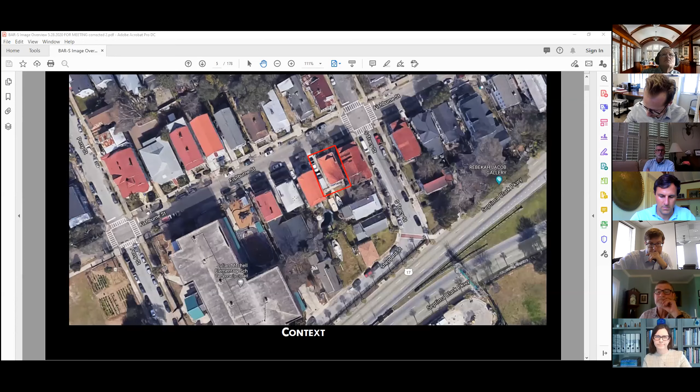Alex, can you tell me who the applicant is for this item? The applicant is Brett Morris. Okay, and if you would unmute and allow Mr. Morris to speak, once I conclude the introduction.

So this is some existing site photos. This is the property in question right here, a closer up view of it from Fishburne, and yet another view from another angle. Here we're looking east on Fishburne Street, and looking west on Fishburne. At this point, I'll turn it over to the applicant for their presentation, if you could allow them to speak, Alex.

So I will be promoting Brett Morris, and I believe the owner of the property, Catherine Xenia—sorry if I butchered your name. I hear some talk in the background. Does somebody have a TV on, or is that in the office, Alex? That's probably me, I'll stay muted. Okay.

Mr. Morris, are you with us? I'm here, can you hear me? Yes, sir. Okay.

So do you guys have a PowerPoint that I'm following along? Okay, so I didn't prepare really a formal presentation to go along with this PowerPoint. I thought that I was just sending pictures to Kim. But if we just kind of go through it...

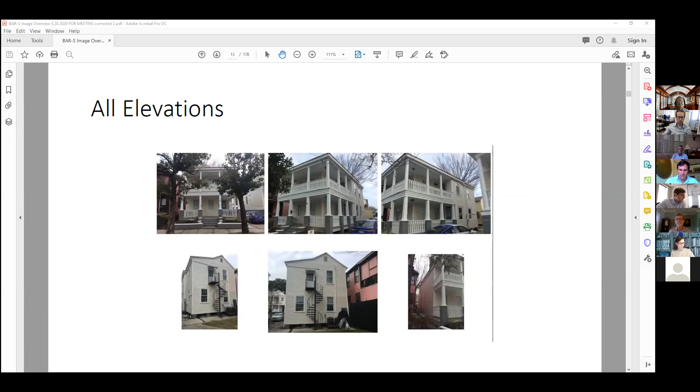I'll remind the board that this is in an area for demolition only, so demolition of the siding is the only thing we're considering tonight. Gotcha. So it's just the siding—the trim, any historic trim, the columns, the soffit, fascia, crown, window trim, all of that's in good shape and we plan to keep that. It's just the lap siding that we're looking to demo.

And it's got lead paint. We plan to follow all the lead-safe EPA procedures. There's 20 or so pictures in this slideshow. That's kind of our scope of work there, but that's pretty much what I just explained.

New lap siding and corner boards, but all other trim to remain as is. The real goal of this is to get it watertight, with flashing, moisture barrier, and sheathing. We've had it exposed for a couple of months now, so we're just trying to figure out what we need to do to get it approved.

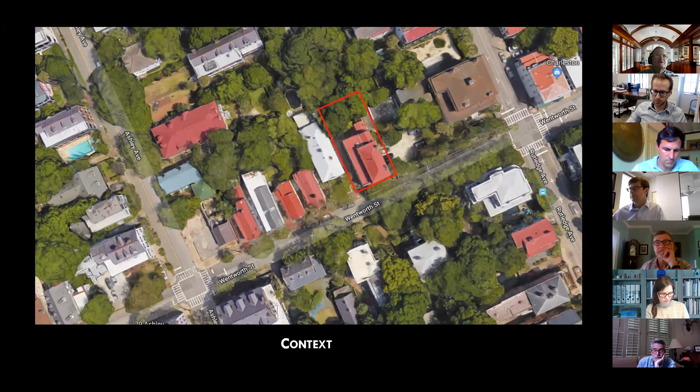Pre-1911 and 1809, the original house 1809, the addition pre-1911. So this is the location of the property. We've seen this project before here, just east of Ashley Avenue on Wentworth.

Some existing site photos of the existing house, and a view of the location of the addition here from the street. Looking west here on Wentworth Street, and then looking east on Wentworth.

The previous motion was deferral for more information on partial demolition of the rear addition in January of this year. Previous board comments: one board member said they would have to have new evidence or change from what was previously presented. Another board member said that from the last review, the applicant is now willing to reuse the foundation and SHPO is okay with the demo, and that was a question.

Are these two issues enough to change a prior board motion? We have to make a determination that enough has changed to alter a prior board motion. Maybe with a deferral, the applicant could get clarification as to whether SHPO is supportive of the demolition. A third board member said, I want to make sure that we don't just kick the can down the road. We all agree that this is a well-built addition.

And with that, I will turn it over to the applicant for their presentation. Alex, if you could allow the applicant to speak, please. I'm promoting Shelley Clark Glidewell to a panelist, as well as John Massillon.

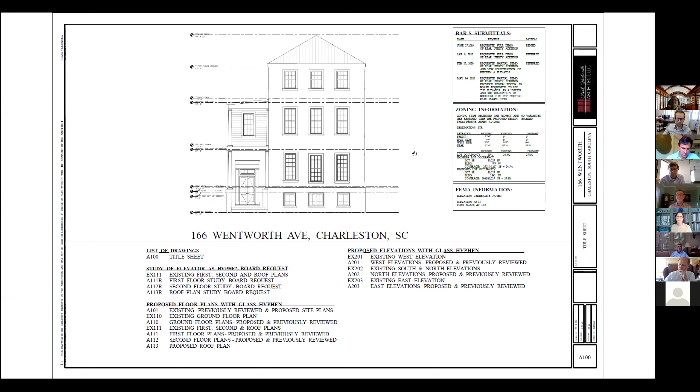Okay, well, we can go to the second sheet. Move forward. Bear with me for a moment. Okay, what I did here was we did a restudy of our previous February 27th presentation.

We had some board members make a suggestion of pulling the elevator in, yes, correct, and try to make it work within that, to make it as a hyphen.

And what happened is we had problems with the design in a couple areas, and the owner was not happy with the location of where we put things. We had to move the powder room so that it was alongside the rear piazza window, which they didn't really want to have happen, mainly because it would not be very nice. And they also didn't want it next to the dining room, which is up in the top there, yes.

And then one thing that also happened is that when we brought it, it's a very narrow space. We already have that brick hyphen there that's off of the original 1809 building, and this brick hyphen that comes off where the kitchen is now is from the 1830s.

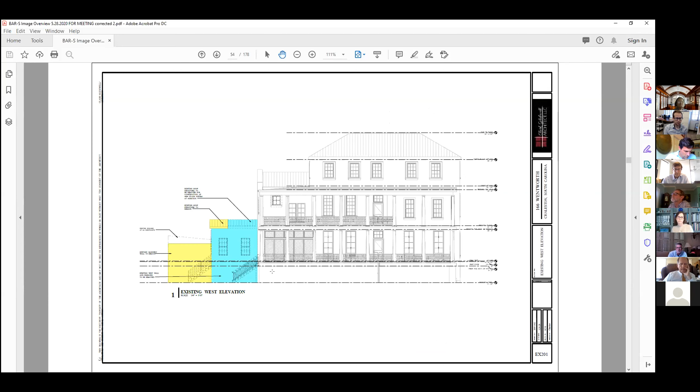This shows our new design, which you can see above on the top. We had the elevator tower pushed up against the rear piazza, and now we've pulled it away with the 3.5 foot glass hyphen. One suggestion the preservation groups have requested is that we make that hyphen a flat roof, to create more definition between the two, instead of extending the gable roof over to the brick hyphen.

We don't have a problem with that. I did make the hyphen contemporary, so it's all glass.

The rear portion of the addition is being removed, but we're going to keep the roof. We'll support the roof with the new structure. You can see that historic wall and how far it goes up, and that is to remain.

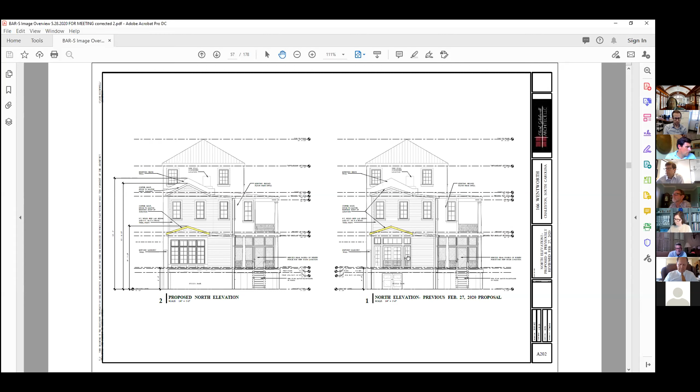Our previous rear elevation had some doors going out to it, with a little railing along the windows and doors. We've taken that out completely and now used windows—tall windows with transoms at the top. We've also moved it so there's no door at the rear for storage at the ground floor; we've only put it on the west elevation.

This is the east elevation. Again, we're saving as much as we can. We've got the portion where the two-story addition goes up that is going to be removed—the blue area, correct.

And then we have, again, our glass hyphen. We do have it in line with the two-story addition.

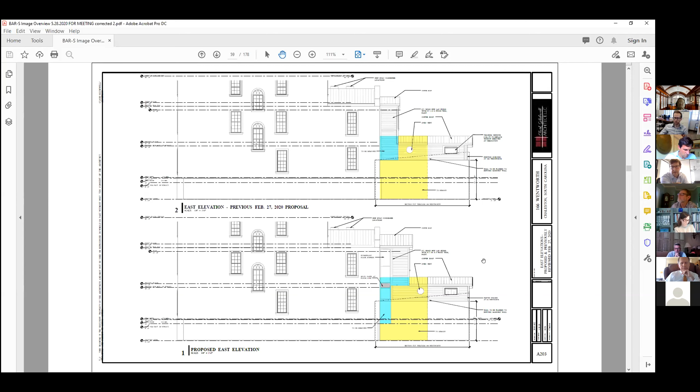Okay, the next one. That's it. Okay, and then we had some photographs. I don't know if you have access to them, because we can see where the...

Just these photographs, Shelley, okay? I had submitted photographs showing the addition at the rear, and things that the board has already seen, but I also included a new photograph of the rear piazza railing, just to show you that it did exist and it was in one piece.

Was that part of your PDF that we're looking at now? I don't think I had it as a separate PDF. Yeah, that's why it didn't get in here. Oh, the submittal requirements require one PDF.

Okay. Well, I will verify that there is the true baluster and railing still in existence. We also wanted to make one comment: we do want a definite decision tonight and hopefully not get a deferral. That's what we're trying, not to have a deferral tonight.

Thank you. Does any board member have any questions right now?

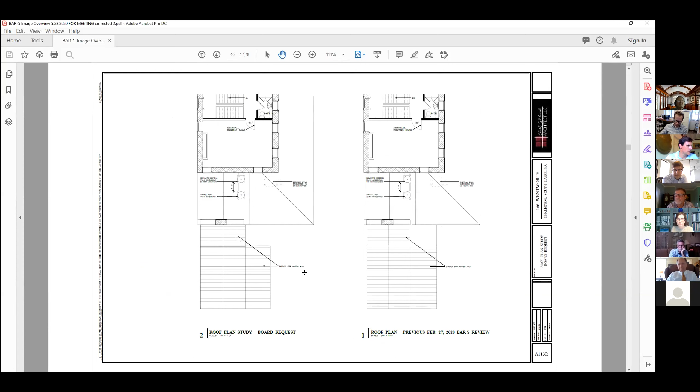Well, right now when they open up the door, there's just not enough room to really get in. When you come up and everything, you'd be right next to it. I mean, we can make the landing smaller. It's just that when you come up to the door from the backyard, it's hard to just go in. It's just not enough room. That's all. Thanks.

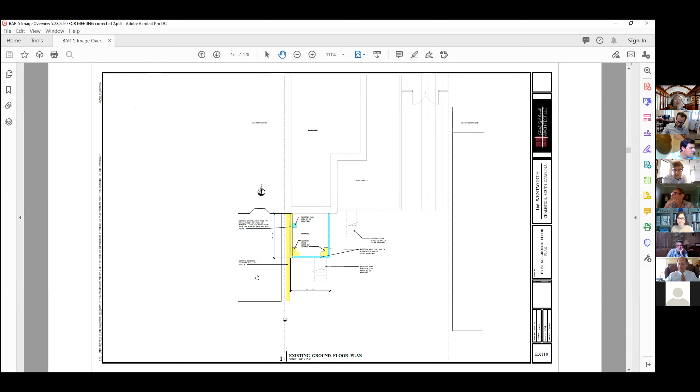Any other board questions right now? I had one question, Mr. Chair, if I may. Please. Let me get to the second floor.

Shelley, is this opening right here an existing opening, or is that a new opening in a new location? It's enlarged, there's a window there. You can see we've kind of filled it in to the left and had to enlarge it a little bit to make the opening work for the elevator hall. Kind of moved it a little bit to the right, you're saying? Okay.

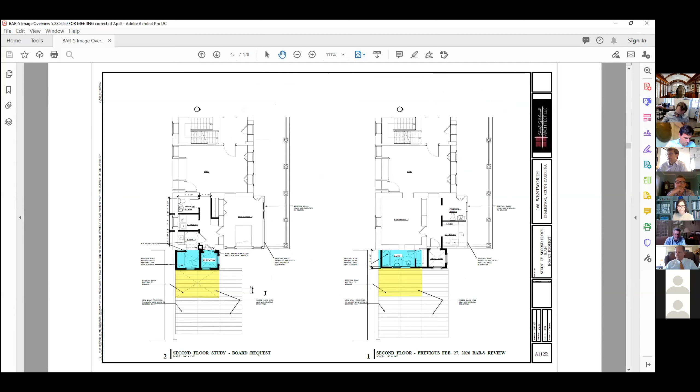Historic Charleston Foundation believes this project is moving in a good direction. We suggest a flat roof at the two-story hyphen portion to further differentiate this section from the historic structure, and by that I mean the entire two-story mass, not just the glass hyphen area. On the east elevation, we recommend extending the hyphen corner trim board down so that the two-story hyphen section reads as a separate mass.

We also have concerns about the oven vent size and hope that this can be reduced. For preliminary review, we recommend simplifying the drawings and not including the options so it will be easier to understand the project. If these recommendations can be addressed, HCF recommends conceptual approval. Thank you.

Okay, well, just to point out that the project was deferred in February, with the board directing that the elevator tower be pulled into the rear addition, retaining as much of it as possible, before expanding widthwise to create a livable kitchen area. This building is a category 2, which is reviewed with much more scrutiny.

Category 2 is defined as excellent high style regional architecture, fine Charleston style, well designed and proportioned with good detail. These are spirited, dignified, frequently innovative, rare, and always attractive and interesting, of irreplaceable importance, to be preserved in situ at all costs.

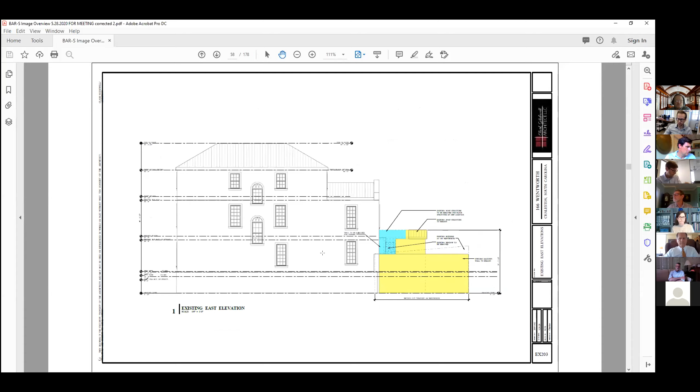One thing I wanted to note is that my owners love their house, and they have lovingly restored the category 2 building. They haven't taken it lightly; they have gone to great pains to restore that building. So when we put this addition on, we're not just trying to destroy the original building. I just want that to be noted.

Also, I presented the restudy to show the board that we did look at it, but our proposed design that I talked about more in depth is what my owners request for the review. And I think that is basically what we want them to review it on. So that's my response.

Mr. Chairman, John Maslon here. I would not comment on the architectural features, but thank you.

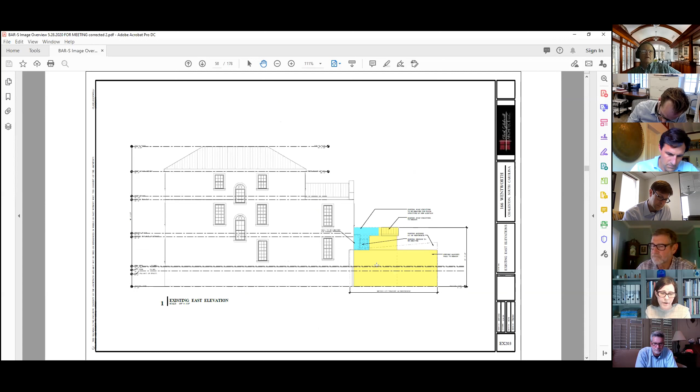So here's my draft motion for conceptual approval of the proposed design with the following board conditions. Number 1, shift to a flat roof for the 2-story addition. Number 2, eliminate the glass at the east elevation. Number 3, extend the corner board on the east elevation down between the 2-story and 1-story addition. Number 4, eliminate the landing at the relocated stair. Number 5, refine and simplify the proposed fenestration. And finally, switch the railing sections, the balustrade sections, at the rear of the piazza to avoid further alterations to historic fabric.

And I would remind you that you also need to make a decision about demolition. Oh, we do? Was that part of the application? Yeah, partial demolition. Okay, can I also move for approval of partial demolition and approval of the proposed design? And finally, final review by staff, I think would be fine at this point.

Dennis, question. Yes, sir. So there's really two things going on here—it's an approval of a partial demolition. Would it be the materials that are necessary to accommodate the proposed design? I think the board needs to determine to what extent partial demolition is approved. Well, I think what we're saying, or what I'm hearing at least, is that we recognize that partial demolition is necessary to achieve the proposed design, and I think we're okay to the extent it's shown as part of the design to be removed.

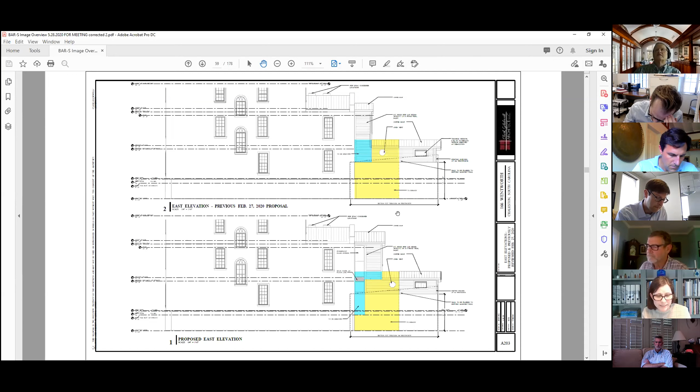I agree. If we're doing final review by staff, I'd like some clarification on the refinement of the fenestration comment. I had said refine and simplify, and honestly, I would trust staff to take that and run with it. I just think if you could look at the west elevation—I mean, there's a lot going on there with the transom, the doors. I just think it could be simplified and a little more cohesive, and I have every confidence staff could help guide that.

Okay, so Julie, to be clear, number five relates solely to the west elevation? No, I think it would follow with the north elevation if you change the window light cuts to 2 over 2. Okay, so all fenestration on the addition.

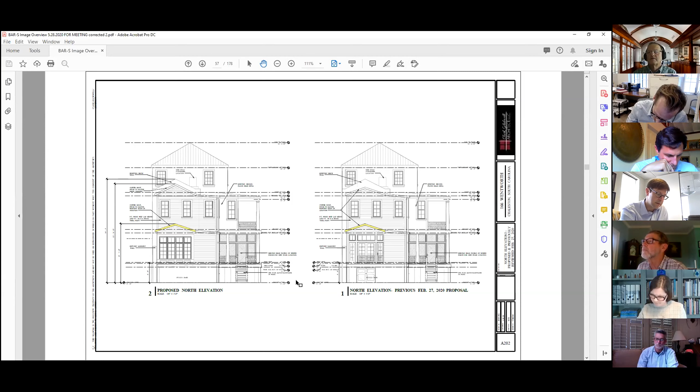I have a question for clarification. When we're talking about the demolition, are we approving it to the level shown on EX110, which shows everything demolished except the wall and two parts of the foundation? So just for clarification, are we approving the demolition as proposed on the approved drawings? That's my understanding, Fillmore.

Dennis, is that your understanding? That is my understanding, Fillmore.

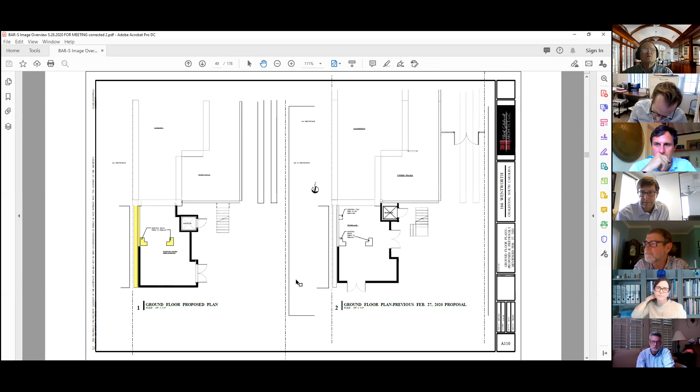Okay, Jay, can I ask a question of the applicant for clarification? Shelley, are these windows double hung or are they casements as proposed? Alex, you may have to allow her to speak, just a second and I'll unmute you. Okay, Shelley, you can unmute yourself.

Okay, can you hear me now? Yes. They are double hung, and basically the other windows on the other parts of the house are double hung or triple hung. Okay, great, thank you.

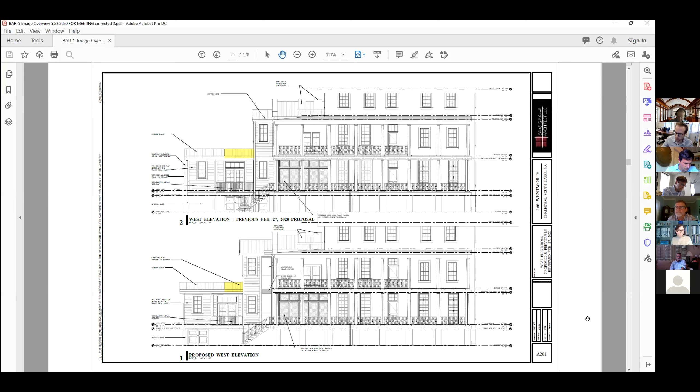That was it, okay. All right, I'm going to start over, I think I got it now. So Julie's made a motion, number one, approval of partial demolition as depicted on drawing A110.

Conceptual approval of the proposed design with the following board conditions. Number one, modify the roof design to include a flat roof for the two-story addition. Number two, eliminate glass at the east elevation. Number three, extend the corner board of the east elevation down between the second and first story additions. Number four, eliminate the landing at the stair. Number five, refine and simplify fenestration on the proposed addition. Number six, switch the balustrade and railing sections to avoid unnecessary demolition of historic fabric, with final review by staff.

Does that sound right? Yes. Okay, so Julie's made the motion. Bill, is that what you seconded? Yes. Okay, I'm going to call a roll.

All in favor of the motion signify by saying aye or yes in favor, or no, not in favor. Julie - aye, in favor. Bill - yay, in favor. Glenn - aye, in favor. Fillmore - yay, in favor. The chair votes yay, in favor. The motion passes.

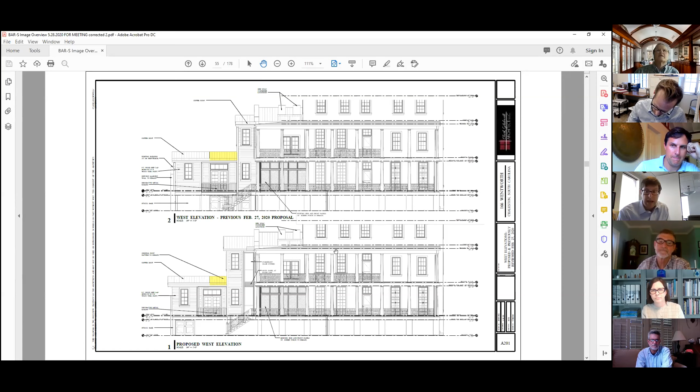Next agenda item is 23 Legare. This is a request for final approval for new construction of a pool house and garage, another Category 2 structure in Charleston, circa 1838, in the Old and Historic District.

Existing site photo showing the area for the pool house and garage. Looking east on Legare, and looking west on Legare.

The previous motion was conceptual approval with staff conditions noted, a board condition to verify visibility of the skewed garage, and final review by staff, that was January of this year. One board member said get the whimsiness of the garden folly. The garage doesn't qualify as a folly, it's not encroaching, but the offset is just for parking accessibility.

Another board member said the bridge is a letdown, it's just too plain, a mock-up may be warranted. Another board member said there's a focus on the folly and not the garage. A fifth board member made an important point: if staff discovers that the garage is visible, bring it back to the board. And we did, which is why it's here this evening.

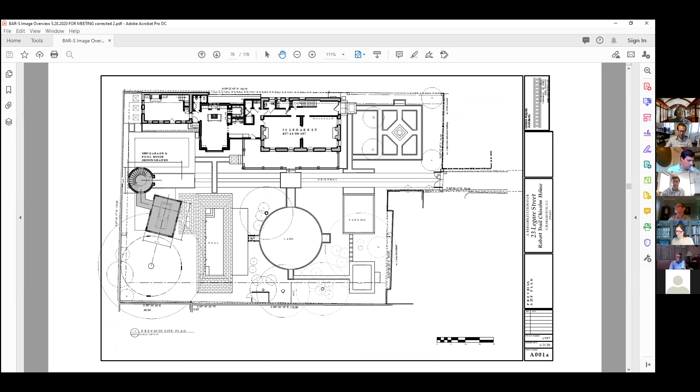In the redesign, we pushed it over. As you can see on the site plan, we pushed it over about 16 inches, as far as we could, to get close to - that's the previous site plan, Dennis. There you go, that's what you're looking for, isn't it? Yeah, so we pushed it over 16 inches, we got it to the setback line of the live oak.

But we do think it's important for usability, and we think it's the quirkiness of having a folly, that having the garage kind of skewed is actually beneficial to the overall design.

If you look at the photograph from the road, go back to the first one, you can see. I'm not sure at this distance if it's discernible whether that garage is on an angle or not. It's really a very small item in that photo.

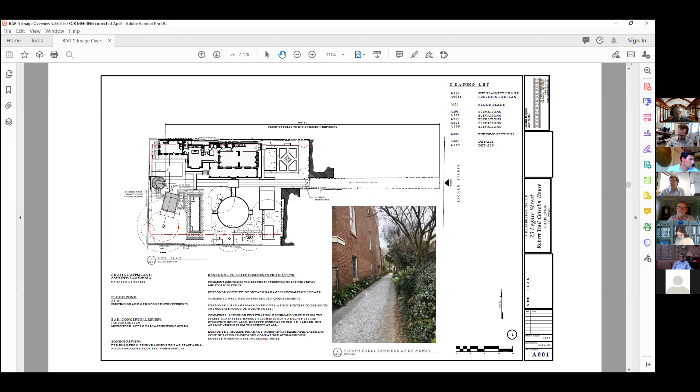We also took staff's comments and redesigned the windows in the package on the garage element, enlarged the size of the rosette windows per comments. I think it's minimally visible, and I think it's going to be a nice addition, a great asset to the property. So we would ask for your approval, please.

Thank you, Glenn. Is there any board question at this point? Bill Huey, I have one question of the applicant. One of the previous board comments was concerning the detailing of the connection bridge. Did you do anything to address that?

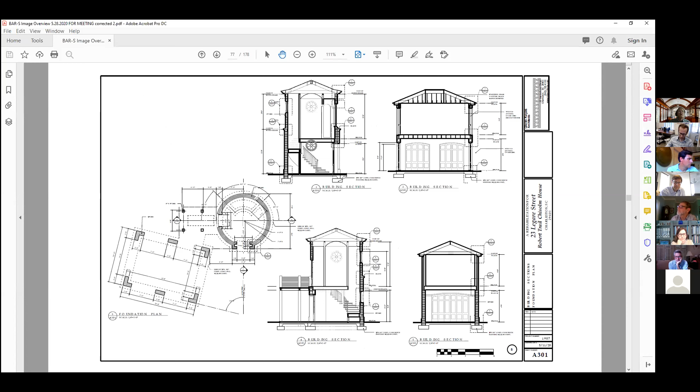We did. There's more detail on that element. It is very simple. We were trying to keep it as a minor part of the design, as minimalist as we can between the two structures. But we did make some changes, and we also added lattice work at the lower end of it to shield the mechanical equipment, which is on the west side behind the bridge.

Thank you. Any other questions? Okay, Alex, is there any public comment?

Yes, we have one person who signed up to speak, and I will allow Erin Minnigan to speak, and you can unmute yourself. Thank you. Erin Minnigan with Preservation Society of Charleston.

The Preservation Society continues to feel this is a very unique design, and being relatively far from the right-of-way, agree it will not have a major impact from the street. We are glad to see the garage building shifted further away from the circular folly. We feel the separation between the buildings has been eroded by the addition of the HVAC screening. We would encourage studying relocation of the HVAC behind the garage to allow an open view between the two buildings. Also, elements of the two buildings, including arched windows, express keystones, and copper and slate roofing, are too differentiated, and we would encourage the applicant to study unifying the materials and details to better relate the buildings. Thank you.

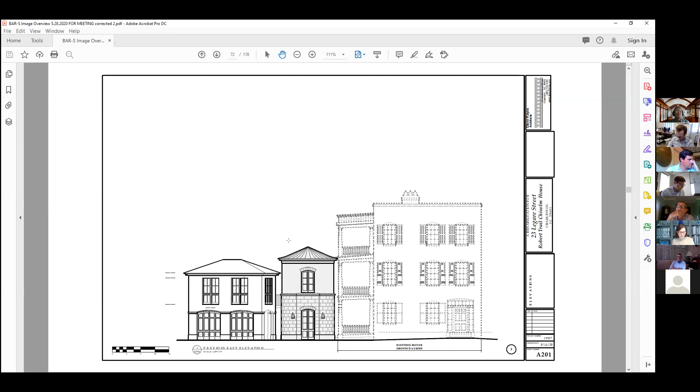Yeah, okay. I appreciate your comments. I think I would ask Dennis if you could possibly let us work this out on the bridge. I think it's a simple thing. I'd hate to have to wait another month or two to get this approved. Well, we're recommending final review by staff, Glenn. Okay, all right. Okay, thank you.

You're welcome. Okay, board discussion. Bill Huey, I agree with staff's comments. It is a nice, really unique design. I really do think that there are only two things lacking, to the point of Ms. Minnigan's comment about the HVAC screening. If possible, the units could move further down behind the garage and leave that open. I believe that would be a much nicer effect.

And also just whatever degree of detailing. I know that's a very minimal point, probably not even visible, but even something as subtle as chamfering the 8x8 posts, just to give it a little bit of refinement, since those are just big square blocks of wood. The main reason I've raised that point is because of how well this rounded tower is articulated, so just some degree of complementary detail to that. Very subtle, but otherwise I agree with staff's comments and recommendation.

I agree with staff. I think the folly, the stair tower, is very interesting, and I think that's obviously what's prominent here. I think the bridge reads more as an element of the folly than the garage, so it needs to have a little whimsy along with the round tower folly.

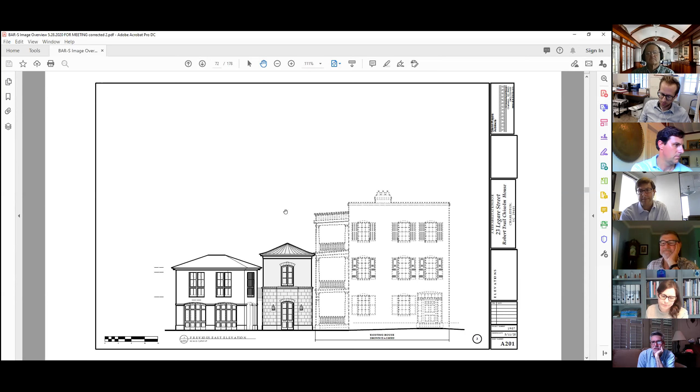Would that be for the HVAC relocation, or the articulation of detailing on the bridge? Well, either or both. Is there maybe board discussion around any additional board conditions to add to staff recommendation?

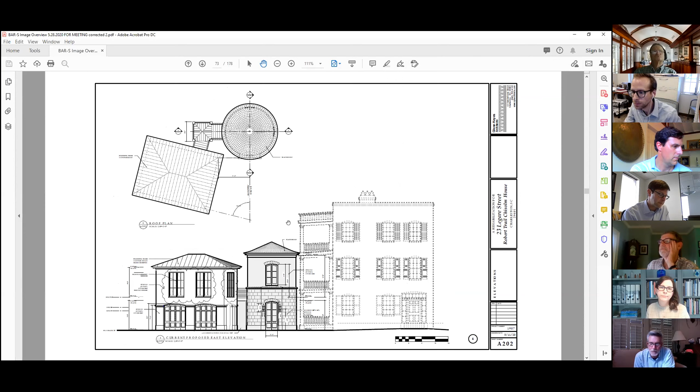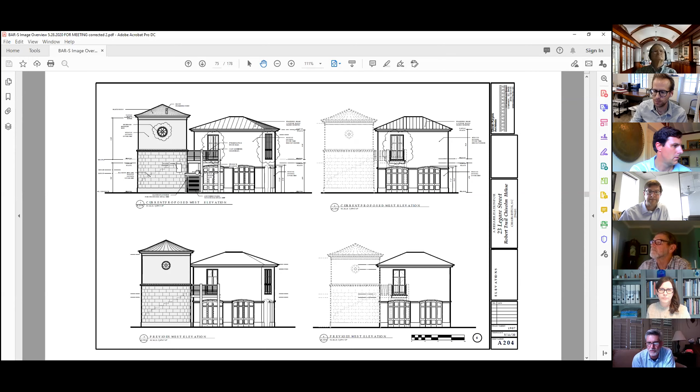I may ask a question, Mr. Chairman, of the applicant. In conjunction with those comments, Glenn, are you still with us? I wanted to ask about the HVAC equipment and the platform. So we are seeing on the drawing screening, and I assume the unit is that visible unit sitting there as a block, unscreened from the back, correct?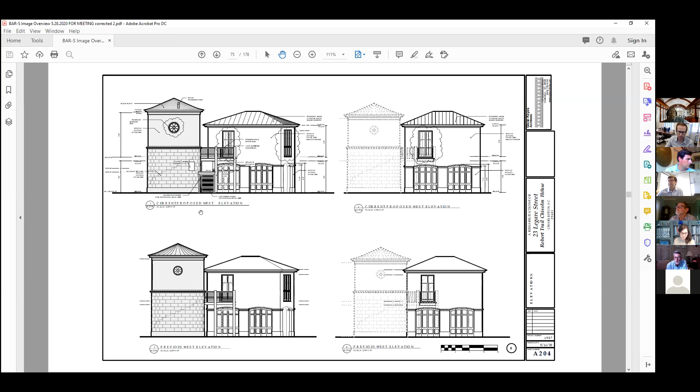That's correct, we could screen on the back. No one likes to see this equipment, and now we have to elevate it above BFE, so there's very few places we can hide it because we're getting close to the property line. If you look at the site plan, we could put it behind the garage. That would push it south and put it completely behind the garage. It might be more visible to those who live there, but it would move it just to the south of the existing place. That's about the only place we can move it, and we could do that.

And I guess my other question, Glenn, was is the air handler unit, the actual blower, going to be inside over the garage area primarily? Is it serviceable to move it over into that back corner of the garage behind the bridge? It is. That'd be fine. Yeah, we can do that.

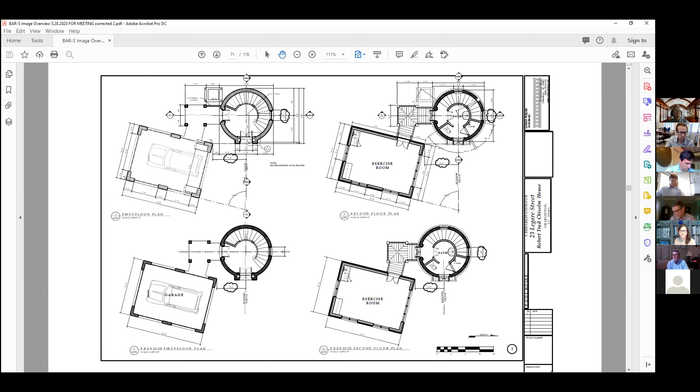Thank you. If I may, Bill, it might be good to just extend this platform out and screen the unit and have it sit right here so that it's integrated with this connection, not yet again another feature. Yeah, I do believe that's a good point. By the time all that happens, it will be virtually out of the public purview, so that's a good solution.

Okay, is anybody feel like proffering a motion? I will, Bill Huey. I'll make a motion for preliminary approval with the condition to restudy the articulation of the bridge elements and relocation of the HVAC platform to the south in conjunction with the bridge element, and final review by staff.

I would second that, this is Julia. Okay, so here's the motion on the floor: preliminary approval with two board conditions. One, to restudy the articulation of the bridge element, and two, to relocate the HVAC platform to the south in conjunction with construction of the bridge element, and final review by staff. Is that y'all's motion? Yes. Okay, so I'll call the roll for a vote.

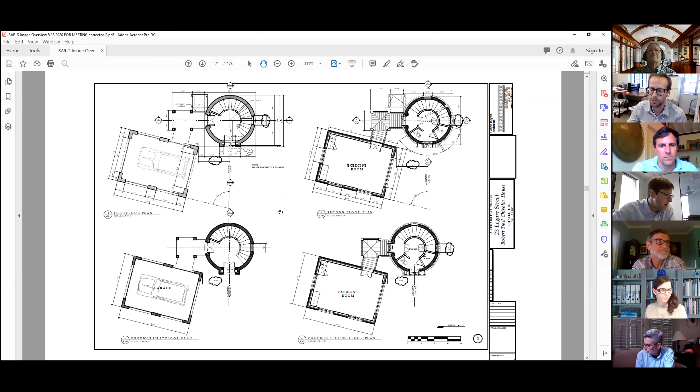Again, y'all know how to vote. Bill Huey, yay, in favor. Julia Martin, yay, in favor. Glenn Gardner, opposed. Fillmore Wilson, yay, in favor. The chair votes yay, in favor. The motion passes 4-1.

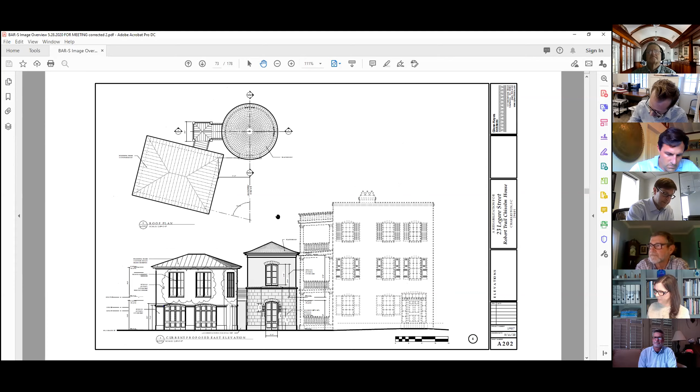Dennis, I think we lost Bill again. This is Alex. Oh, okay. I think Bill's gonna have to go to his office next time. Let me see if I can get him back. I'm sure he knows that he's not in, but we'll see.

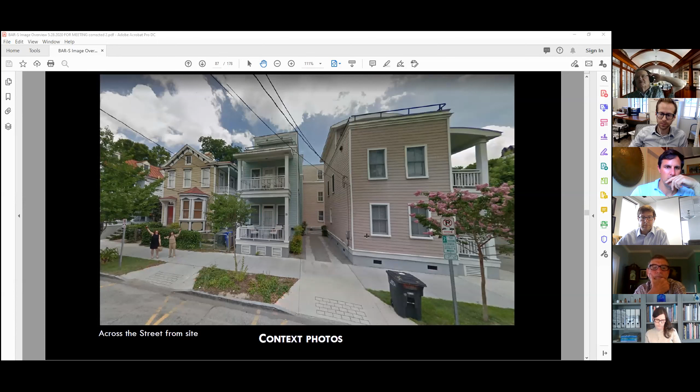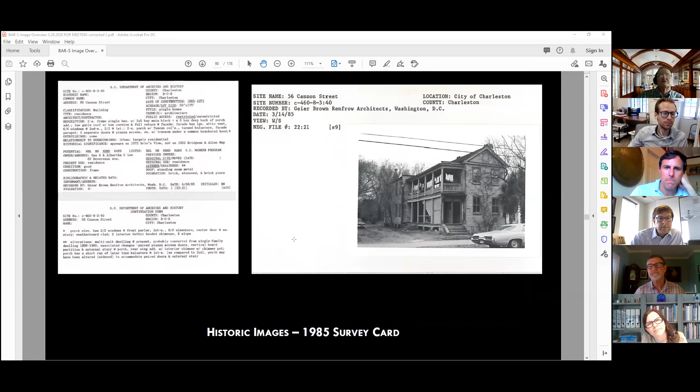So this is a view from across the street from the site, with some excited neighbors there, looking east on Cannon, and then looking west on Cannon. And this helped us identify the age of the building, which is 1865 to 1872, and the Sanborn maps confirm that. With that, I'll turn it over to the applicant.

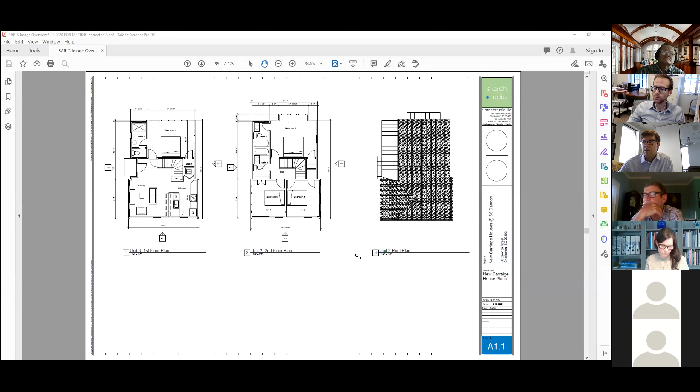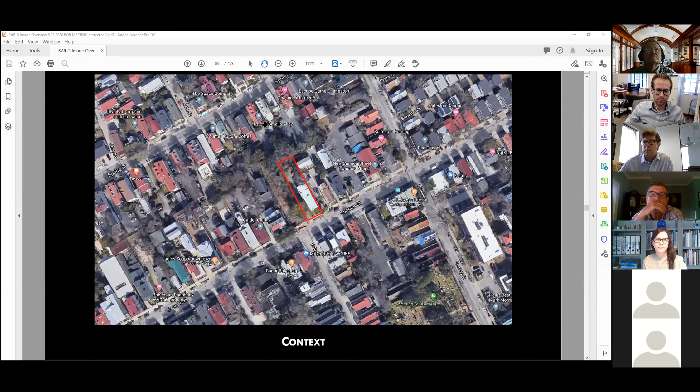Guess with that, I'll end and answer any questions. Okay, thank you, John. Are there any questions from the board at this time? Okay, hearing none, we'll go to public comment.

Alex, Jay, I have one question, if I may, sorry, I was muted. John, are there any variances or special exceptions required for this? No, we meet all setbacks, all lot occupancy, parking, et cetera. We've gotten the site plan approved from zoning. Okay, thank you.

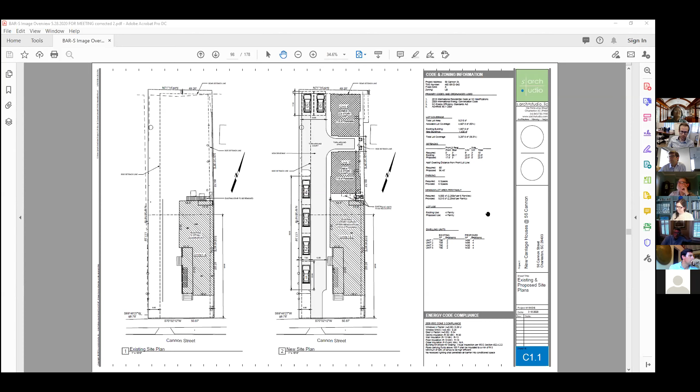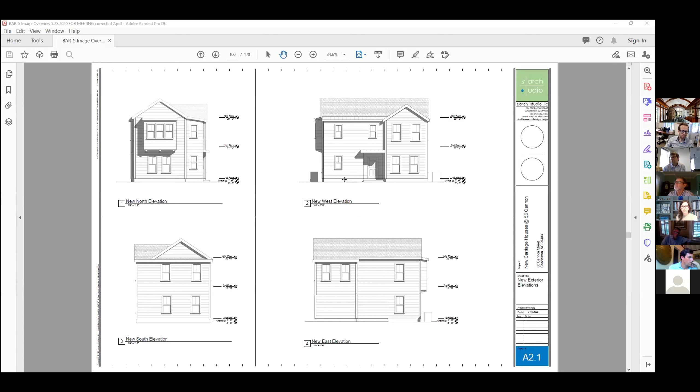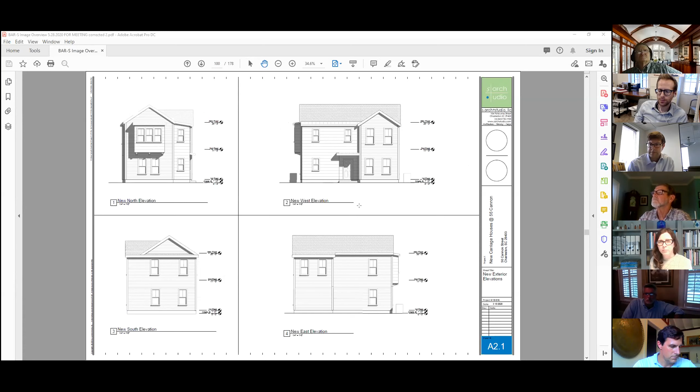This is Julia Martin, and I looked at this property today, and the visibility would be pretty high as you look down this driveway from Cannon. Similar to staff's concerns, I'm afraid that as you look down that driveway, it would all read as one big solid mass structure. I think these are pretty large footprints and aggressive programs with 4 bedrooms each, and their west elevations come out flush—not with the historic mass of the single house, but with the additions and infill at the rear of the existing house.

And there's less than 6 feet of breathing room between the old and the new. So although I do think this property can handle 2 dependencies, in my mind, the mass and scale of these is just too much, and the architectural direction lacks delicacy and deference to the historic.

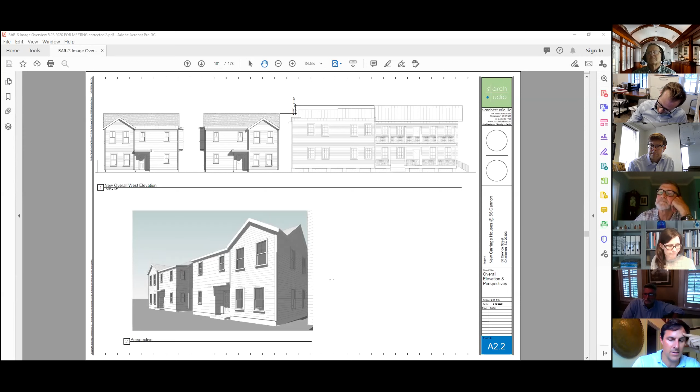Glenn Gardner: I would frankly echo exactly what Julia said. I think the program for what is trying to be shoehorned on here is just too aggressive. And I know zoning has approved the site plan, but the parking just doesn't function, but I'm not the zoning department. I think the program requirements are making it overwhelm the site.

Fillmore Wilson: I agree with Glenn and Julia and staff. There's a lot of program on this site, and I think the mass of the buildings is too great. And I agree with staff that the architectural direction lacks subtlety and deference to the historic structure. So I am in agreement with staff.

Bill Huey: I really don't have anything to add. I agree with the comments that have been made. Chair: Okay, I'm aligned with staff too. Is there any other discussion to provide direction to the applicant in terms of to what degree to shrink the footprint, to pull it in, pull it away? That's what I'm getting at.

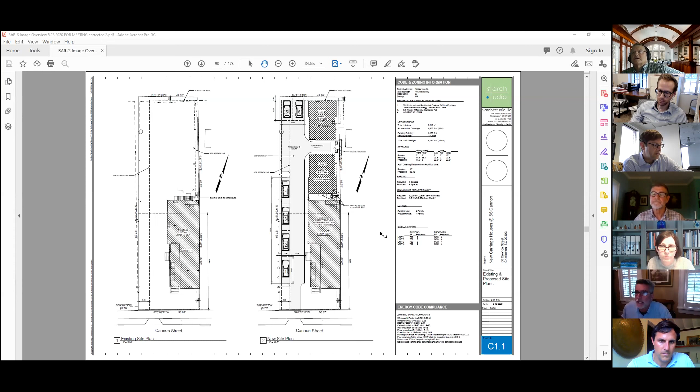Glenn? Aye in favor. Fillmore? Aye in favor. Bill? Yay in favor. Julia? Yay in favor. Chair votes yay in favor. So the motion passes.

Okay, the next agenda item is 241 St. Philip Street. This is a request for conceptual approval for new construction of a single-family residence behind 3 previously approved residences at 243 St. Philip Street. It's new construction in Cannonborough Elliotborough, the old city district, and height district 2.5, 3. So St. Philip here, south of Line, north of Bogard Street.

West side of St. Philip. This is a view of the site right here. And looking south on St. Philip, the site over here on your right. And then looking north with the site over here on the left. And I will turn it over to Mr. Gould. Alex, if you could allow Mr. Gould to speak.

Sorry. All right. Hello, can you hear me? Yeah. Yes. Good. All right. Well, maybe Dennis, could you go to the first slide, the first site photograph?

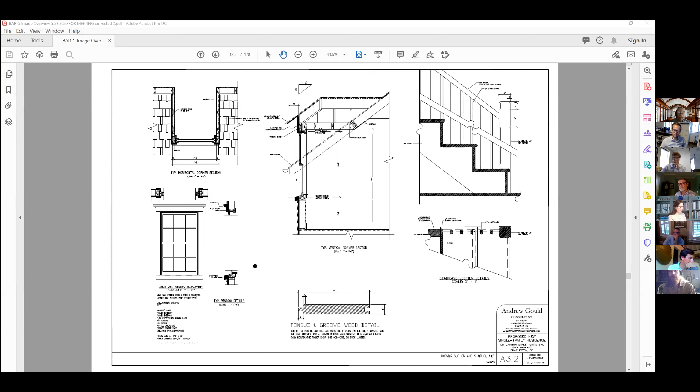But like I have done with those other 3 houses and with most of the houses I've designed in recent years, the 3rd story is kind of disguised to really just look like a 1/2 story from the exterior. And moving on, you can see again my typical details, which are of course a lot better than what one sees on most new houses—beaded trim and sills and moldings and everything of the quality that you typically see on a historic house in the neighborhood.

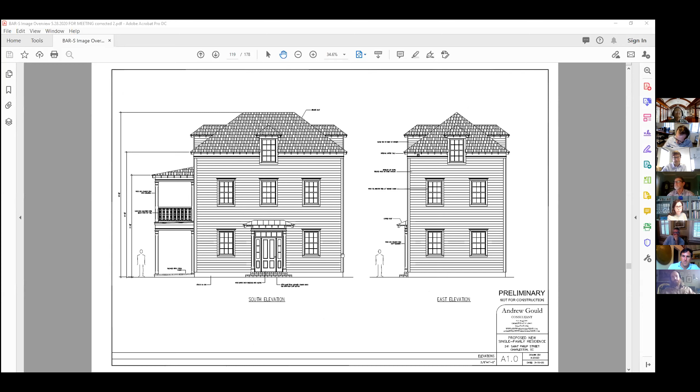As you can see on the 1888 Sanborn map, it was actually a distinct parcel even then. So it's kind of always been a landlocked lot, and somehow that McHugh Alley got forgotten over time and no longer appears on plats or the tax map. But yeah, it's always been its own lot.

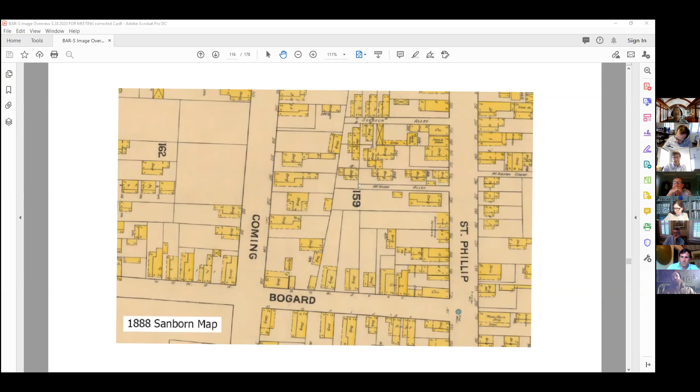Okay, one last thing. Will that reestablished alley be a public right-of-way or private? No, I certainly don't anticipate the city wanting to take it over. I think it would just be a matter of giving that easement that exists there a name and a street sign, if we can get the blessing from GIS and addressing to do so, because the addressing is kind of stupid right now. It would be 243 A, B, and C followed by 241. I'd rather it be 1, 2, 3, and 4 McHugh Alley. So hopefully GIS will allow us to do that. Thank you.

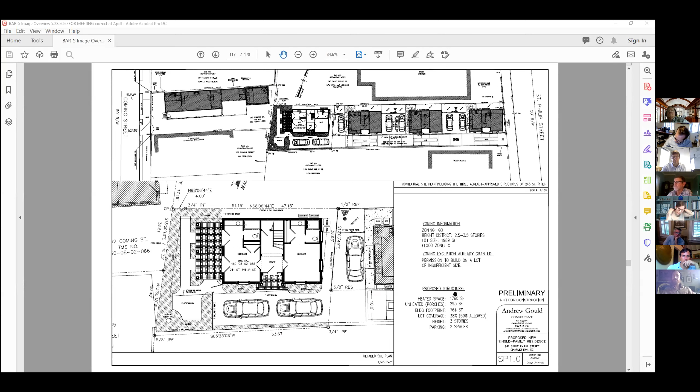Any other questions? All right, so Alex, we'll go to public comment. Is there any public comment? No public comment for this one. Okay, so we'll go straight to staff recommendation then.

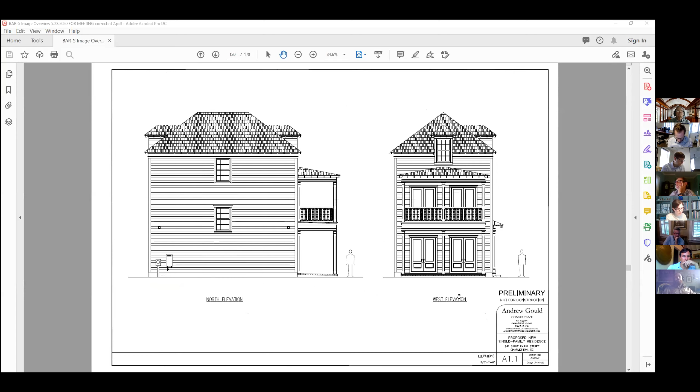Let me bring that up. So this proposal is taller than the approved buildings fronting on St. Philip Street, and in addition, it towers over the house at 262 Coming Street. It is not subordinate to either of these buildings, directly contradicting the ordinance—that's 54-306 General Requirements, paragraph 12—and the principles. Height, scale, and mass, therefore, need to be restudied to be lower, smaller, and less massive.

Proposal also does not meet the ordinance requirements for the ratio of height to width, and this is an even bigger issue I think—that's paragraph 9 of those same general requirements. The width will need to be reduced to comply with that requirement. The space between the window heads and eaves needs to be reduced. This will help reduce the height and mass, but this alone may not be enough.

The building is essentially a replicated version of many designs the board has seen lately, and we feel the balustrade is high style for a rear structure—chamfered columns, decorative balustrade. Otherwise, details and materials are well conceived and appealing. So we're recommending deferral for height, scale, and mass with the conditions noted. And I'd add that the board does have the authority to reduce the height by a half story for context immediate to the project and greater context. And that's it.

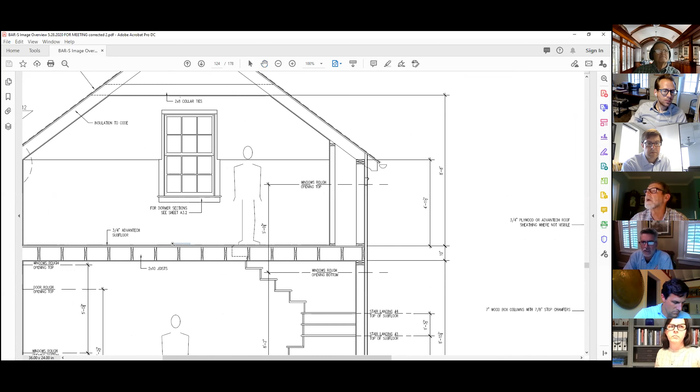Bill Huey, can you go back? Yes, up to the building section. I'm gonna look - it's illegible to me, but maybe you can make it out. I was just trying to determine the floor-to-floor heights we're looking at, or ceiling heights rather. Okay, that's getting better. Okay. It's 4'11" to the top of the knee wall here, but this internal knee wall gets it up taller than that. 8'8" to the collar tie. Right, it doesn't say.

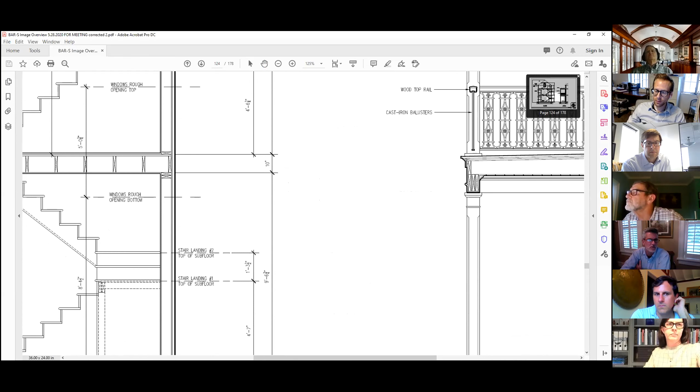It's probably up to get it up to code, which is going to be 5 feet or more. That's understandable. And so we have 8'10 1/4" for the next level down. And then we have 9'6 3/4". Okay, that's what I was wanting. Thank you. You're welcome.

Okay, this is Julia Martin. Just to start, I'll comment that I have enormous respect for staff, and I feel like everything goes better for everyone when we all display that respect for staff. But here are my thoughts about this project.

To me, the calculus on this one is a bit different from a project dealing with a historic house and a dependency. This is a distinct parcel in the middle of a block. From the St. Philip perspective, we're looking at a contemporary development, and I believe we often do like to see the height ascend toward the interior of a block, for what that's worth.

And like we saw at 23 Legree earlier, there are a number of examples of substantial houses set back on flag lots in the historic district as well. So I'm personally not concerned with this structure being subordinate to the street fronting houses, and at least from St. Philip, I don't think the size difference would be perceptible from the street.

In terms of design direction, this seems respectable to me, refined without being overwrought. It's true that it shares a good bit of DNA with other recent designs from this architect, but I'm not really troubled by that. I think that's a phenomenon with a long history in the city, and I'd much rather see multiple iterations of a good design than multiple designs with a wide range of successfulness. So that's my take on it.

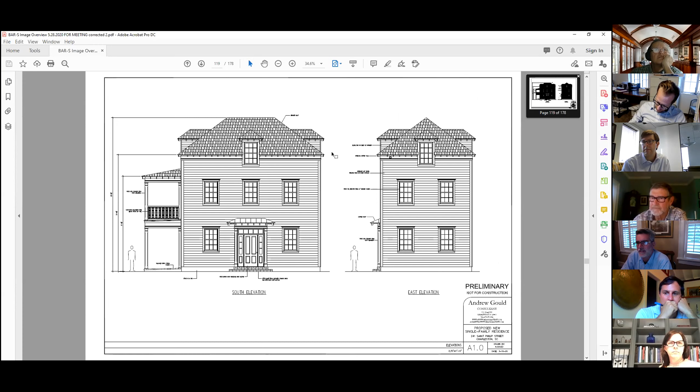I believe, even within the floor-to-floor heights, it looks like at least the eave heights could be contiguous with the other homes that have been designed. And with only that minor adjustment, I think I'm comfortable. As far as the degree of detailing on the house, I was lamenting the lack of detail on the last application, and I believe there's a good level of detail on this home. To whatever degree, that's what makes it interesting.

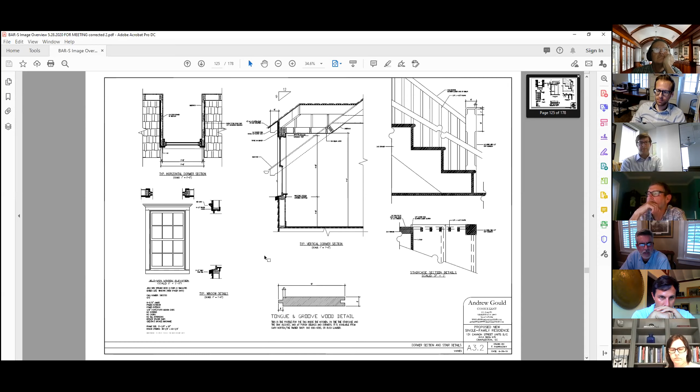Looking at these details presented on the screen, the window surrounds are detailed well, the dormers are detailed well, the eaves are detailed well. I'm encouraged by that. I think, in my view, it would be basically a minor concession of height to have the eave height of this home correlate a little more with the other homes that have already been designed. But other than that, I believe it can work pretty much as is. So that's my comment.

This is Jay. I'll defer to you guys on the general architectural direction, but in terms of the height, mass, and scale in relation to the surrounding buildings, and the philosophy that the further back a build on a lot you go, the more subordinate it should get to the main structure—I do feel sympathy for the applicant on this one, in that this seems like it's been a lot for a hundred and something years, and you're not constrained by showing deference to the main structure on the lot, which is why I've always understood this philosophy of subordination came along. So in terms of height, scale, and mass, Bill, I'd go along with you in terms of a nod at a reduction in height, but I generally don't have a problem with it, and I'll defer to you guys on the architecture.

Glenn Gardner. I'm aligned in general with what's been said. I certainly appreciate the architect providing detail, especially at this level. I think, to the point about the height, it is a unique lot and a unique situation where we have to consider it a little differently. I'm not saying there aren't a few tweaks that could be made, but I'm not overly troubled by it on this particular application.

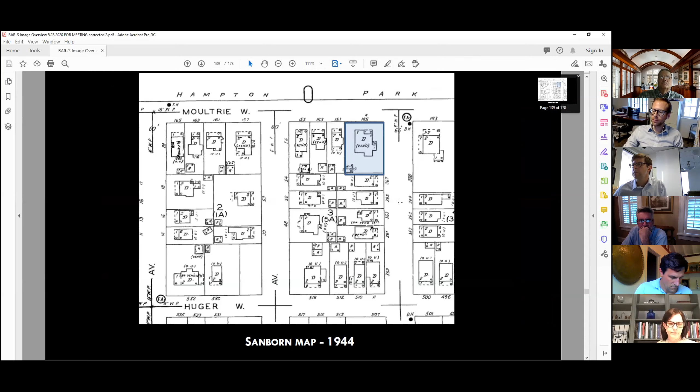So the previous motion from the board was denial of copper material and a requirement for use of tile material, and that was in February of this year. Previous board comments: one board member said, if anyone can do this right, it is the applicant, and agreed with the synopsis of the Preservation Society, noting the applicant has the knowledge and skill to handle this, and asked what is the character-defining feature of the house, the tile roof. Another board member said, very well, agree with staff. And finally a third member agreed with staff's recommendation.

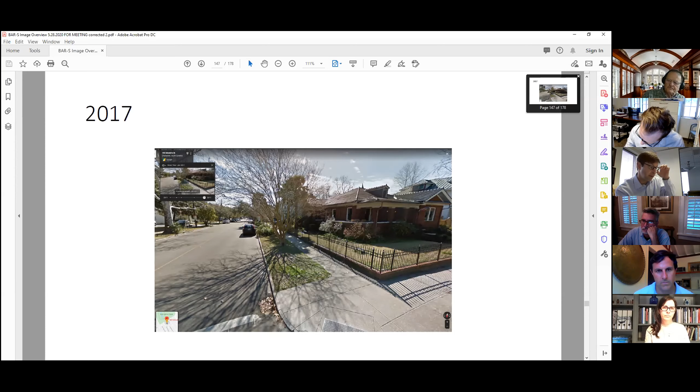Okay, thank you everyone. The next agenda item, I don't even know how to pronounce the street, 24A Ogier Street. Yes, and this is a request for conceptual approval for the enclosure of a roof terrace. Building is not surveyed. It's newer, Radcliffeborough, circa 1917, and the old and historic district, but that's not accurate — it's not 1917, it's within the last 5 years, 6 years.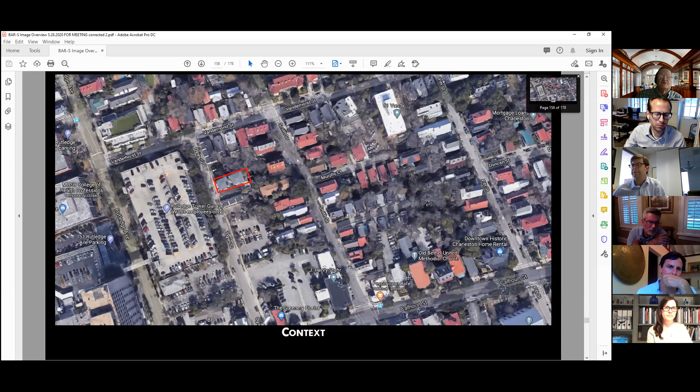So here's the site on Ogier between Vanderhorst and Calhoun. This is the building in question, and a view looking southeast on Ogier. And then looking north on Ogier, and looking south, building over here on the left. And with that, I will turn it over to the applicant for their presentation.

Alex, if you could allow the applicant to speak. Yes, I just promoted Liz Drake to a panelist, and you can unmute yourself. Or I'll unmute you — there you go. Sorry, I gotta unmute. We can hear you. Oh, you can hear me? Sorry.

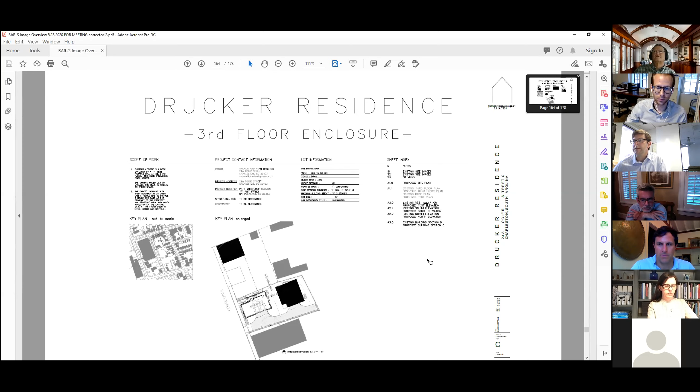Hey, this is Liz Drake, I am working for Patty Wilborn Design on this project. The clients approached Patty and would like to enclose the third floor deck to capture that space for an office. So thank you.

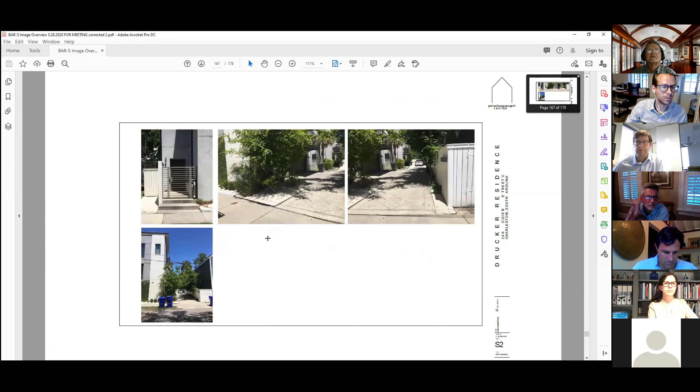Currently the house has the garage below, the first floor is an open concept living area, the second floor is a couple of bedrooms, and upstairs is the master. In the 3D views, on the left is the existing and on the right is the proposed. There's that parapet wall, and currently the construction has shiplap siding and 3-coat masonry stucco, and I just thought we would continue with that material.

Could you move maybe to the elevations please? Sure. And using the same materials, but where the parapet wall is, we are kind of stepping in a little bit — it's an omni-block system, so we would step in the width of one omni-block, then come up. The windows are aluminum clad, same roofing material, very low minimal slope. Just trying to give them a light-filled room that they can use, and also continue the design, but make it secondary to the overall design.

That's one part of it. And then the clients would also like to duplicate the style of the steel gate they have currently going to the front entry. They would like to take that and

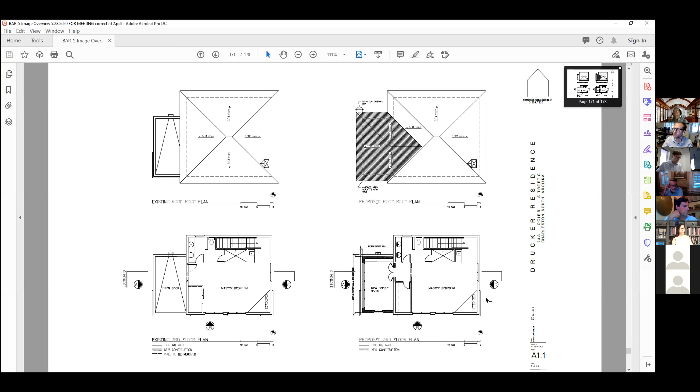Okay, thanks Erin. So, staff recommendations: this building was approved and constructed prior to the modification of the current height districts in the city ordinance, and was compliant for height at that time. However, the project is representative of why the ordinance was changed, to avoid overly tall buildings in residential areas of the city that are out of character with the immediate context—that's the rocket house idea.

The height of this building would not be permitted to be constructed today in this area. The step back of the height and mass at the street, by virtue of the open terrace, helps to somewhat mitigate the impact. However, infilling the terrace with enclosed space, thereby extending the height and mass, is inappropriate for the context. And just a technical note: I think it's doubtful the gate will not need additional vertical support members, but that's a detail to be considered at a later time. So we're recommending denial of the application based on height, scale, and mass.

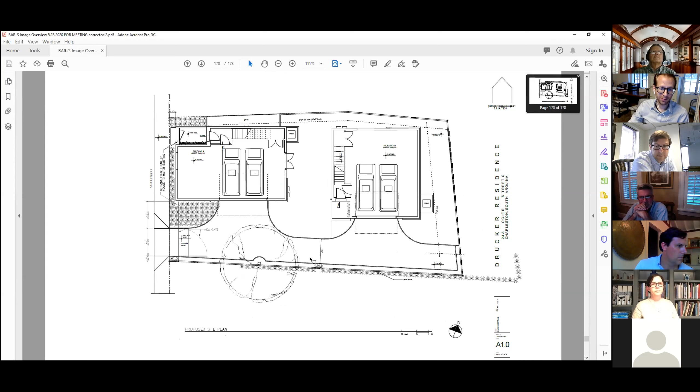Liz, would you like to respond to public comment or staff recommendations? Well, I mean, there's the parking garage across the street from here, and yes, the building is tall. I tried to be sensitive by stepping it back in that space, and I think we've got the wrong—there was a better 3D than this.

I'm sorry, I had a more clear one, and I think in the rush to get it all going... but the fact that the building was allowed to be built that tall has nothing, I guess, to do with this now, and we're just trying to enclose that space, step it back. It's across the street from a garage. Yes, it is the taller building of the two surrounding it. The clients would just like to grab that space, and I tried to do it in as sensitive a way as possible, adhering to the design we had.

So, that's pretty much it. I don't see that it would be usable space if we tried to step it back any more, so I guess it's up for discussion as to the homeowner's request and the fact that the house was built like this. I mean, we're not increasing the existing height—we're staying below the height that it is now, just to be noted. So the fact that it was built that tall, I wouldn't think would really matter here. It's more just a streetscape issue. And you have the 3D images to look at.

Okay, thank you. So we're in board discussion then. Mr. Chairman, Will Huey, I have a question of staff.

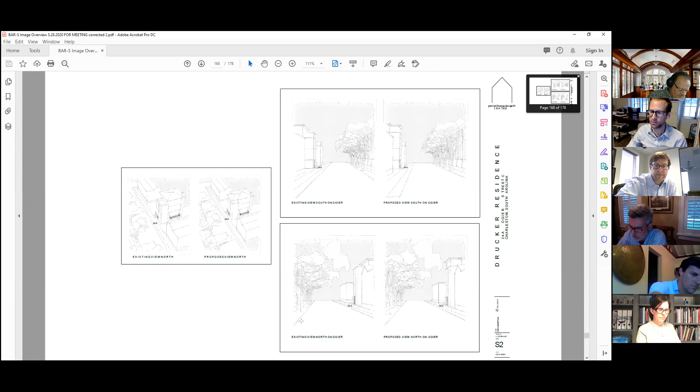Ms. Minigan raised a point in her comments concerning the front mass, and the fact that it was deliberately made subordinate in order to create a lower presence to the street. That may be my recollection, given the fact that I believe this building, as stated, is maybe not 1917, but 2017 or whenever we're looking at here. Yeah, was there—is there any record in the minutes of a presentation to that effect, that it was deliberately set for that purpose? I'm just interested to know.

I don't know the answer to that offhand, Bill, but it wouldn't surprise me if the building came in where this area of the building were as tall as it is out here as well, that we would have asked that the mass be reduced at least out at the street. But I can't definitively confirm that now.

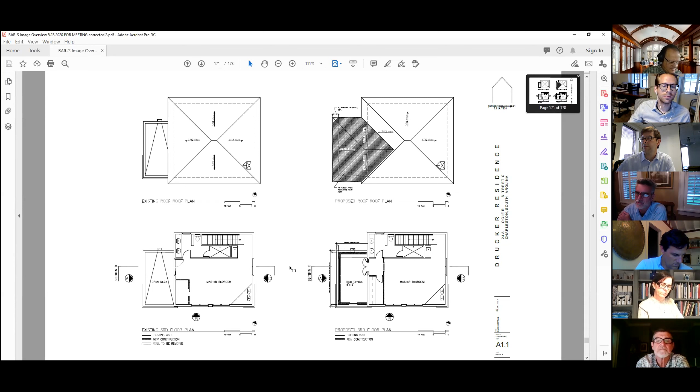Thank you. I asked that question because it almost does look like that deliberate design intent for that purpose, but I appreciate it. Thank you. You're welcome.

I have another question for staff. Is it possible that we could consider conceptual approval of the gate below?

Sure. All right, I would tend to align myself with staff's comments about the enclosure at the top, and along the lines of what Bill was saying, I'm confident there was some discussion of the effect of stepping the mass back at that top level. I think that was probably key in getting it approved, so it would be wrong to undo that at this point. But I don't have a problem with the gate.

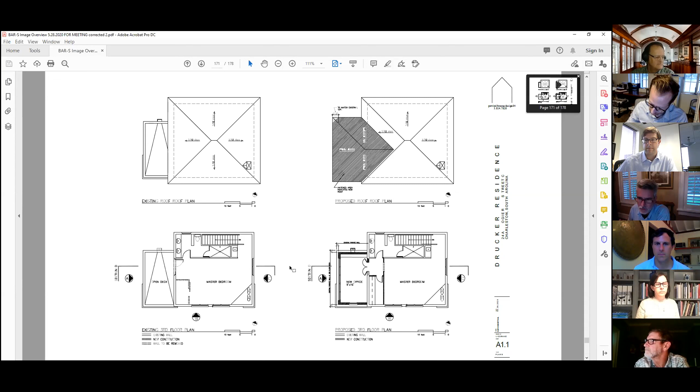Bill Huey, I agree with Julia's comment. I would just say if the applicant wants to research the file, they should be ready to do that. But I do believe, to your point Julia, that probably was intentional — it looks like an intentional design move. So I agree with your comment.

Yeah, Fillmore here. Sorry, go ahead Fillmore. No, that's right. Go ahead, Glenn. Glenn Gardner.

I am completely fine with the gate request, but I would just urge the applicant to carefully explore what opener system they use if the gates are mechanically opened, because I think this does flood, if I'm not mistaken. A typical arm opener mounted low to the ground would probably end up being a headache for the owner. So perhaps a method of having the arm opener mounted higher but disguised, or there are some really good fully sealed in-ground openers now that wouldn't be visible at all.

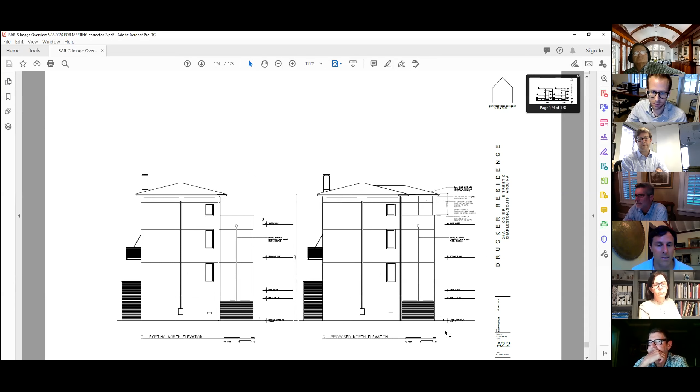I missed the applicant's presentation because I was still locked out — that was my fault. But I've looked at this and I agree with my fellow board members. I don't have any real issue with the gates, but certainly adding mass to the height of this building, I think would be problematic.

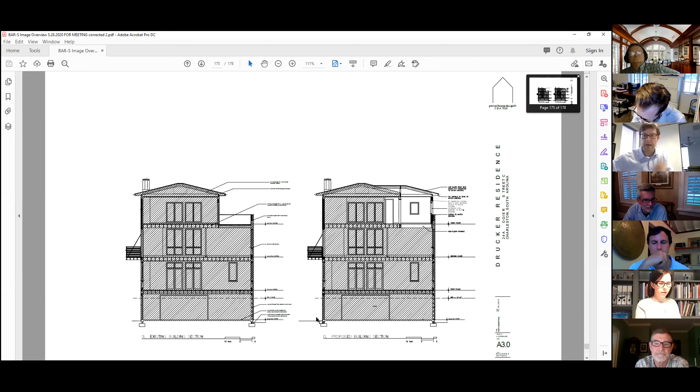Okay, sounds like everybody's fairly well aligned. Julia, were you getting ready to make a motion? I was. All right, here we go.

I'm going to make a motion for denial of the roof terrace enclosure, and conceptual approval of the gates with final review by staff.

Guys, is there a second? This is Bill Huey, I'll second. Sorry, it took me a minute to click. All right, so Julia's made a motion for denial of the roof terrace enclosure and conceptual approval of the gate with final review by staff. Bill has seconded it. I'll call the roll.

Julia? Yay, in favor. Bill? Yay, in favor. Glenn? Yay, in favor. Fillmore? Yay, in favor. Chair votes yay, in favor. Motion passes unanimously.